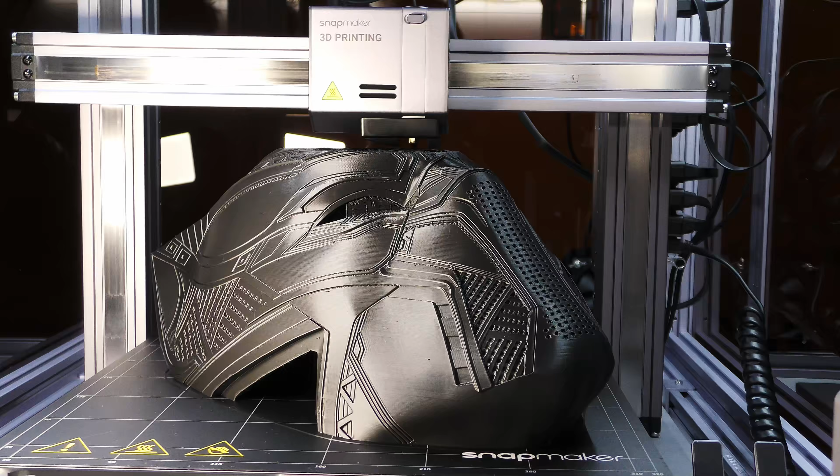Today we will take a look at this big boy, the Snapmaker 2.0 A350ENT, which means the all-in-one version from the bigger Snapmaker with the Enclosure and the TMC silent stepper drivers.

Let's crank it open. Welcome to the Snapmaker family.

Oh, and some stickers. We have a guide for the machine, and also, because this is the bundle, we have a guide for the enclosure. We will start with the machine and then work on the enclosure.

Packed out everything from the big box, and now comes the small boxes. After filtering down the boxes, there are not so many, to be honest.

We have this fancy toolbox, the clamps, finally a good goggle for laser, which is a proper OD6 Plus, 190 to 540 nanometer, CE certified, and also CNC glasses, which is just against the splinters. Wow, okay, that is slick.

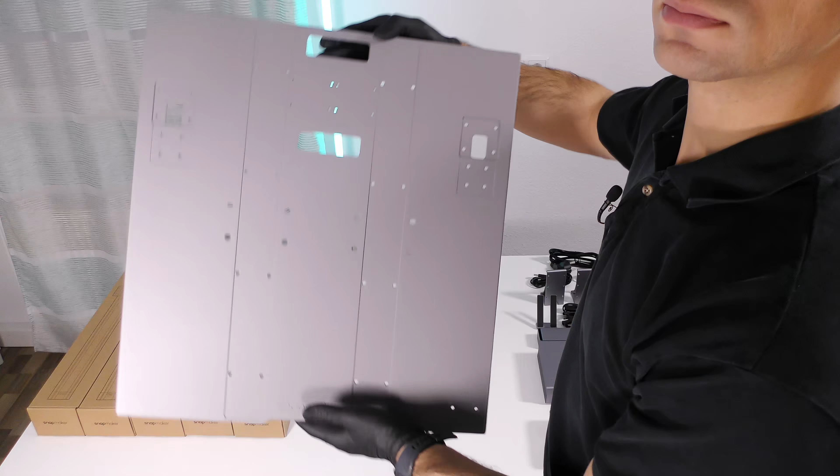All parts are so well polished and look pretty cool. And here is the rock-solid one-piece die-casted aluminum base plate.

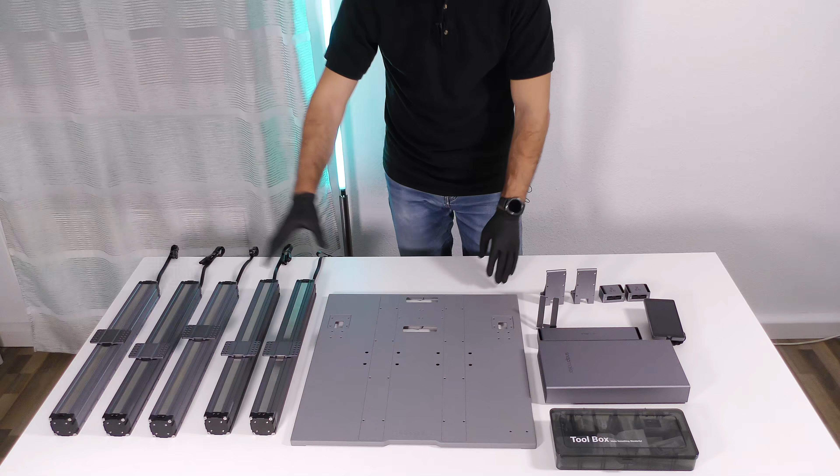Packed out everything. We just left with the base, the linear modules, the power supply, and these parts, so it's not that much. It should be a quick assembly.

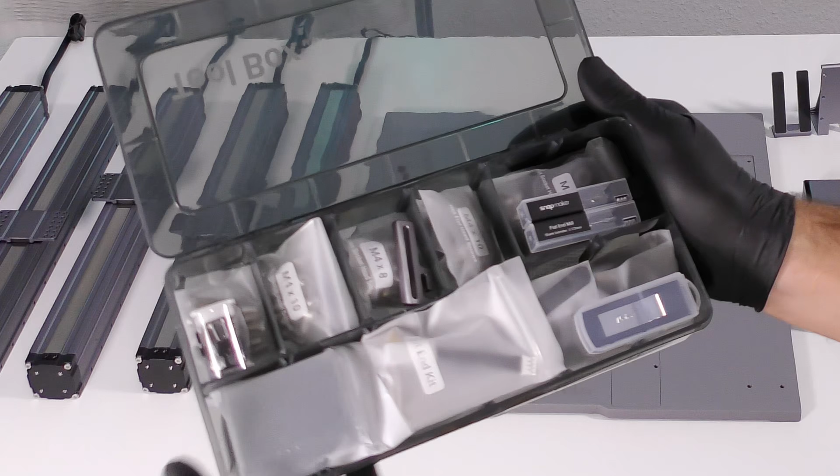The toolbox has everything labeled. The flat end mills for the CNC. These are the feet for the base.

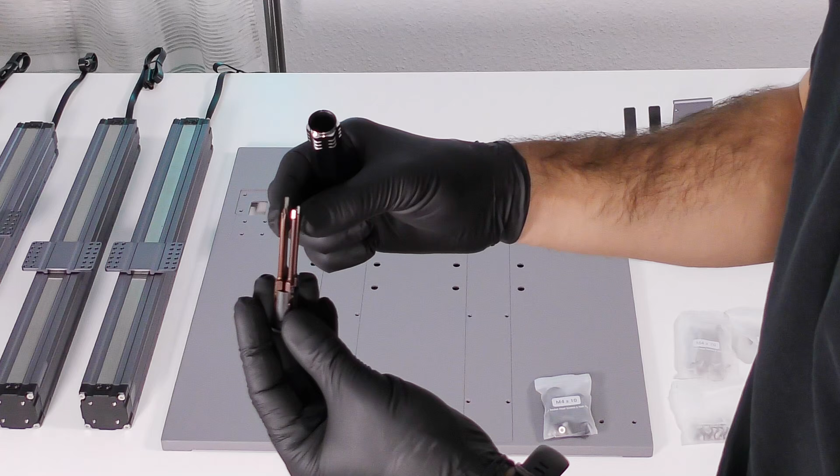After unpacking all the packaging, the most important tool is this one. We will use it a lot. We can just open it and choose one of the heads that we need. Let's say this one. Then put it back and put this in place.

Following the steps in the prettiest manual I've ever seen, the assembly is entertaining. This is one of my favorite parts, getting to know your machine and at the end feeling that you are also involved a little bit in the final result.

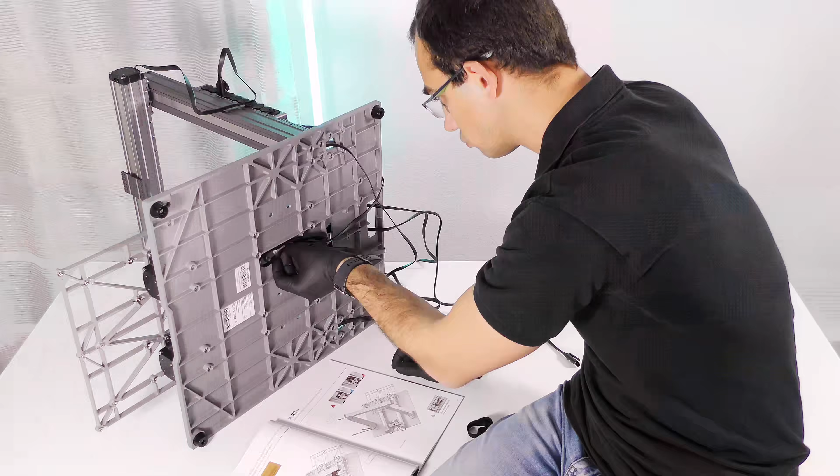For the cable management I use some cable tie mounts to hold the cables in place. And just like that we are ready with the base structure.

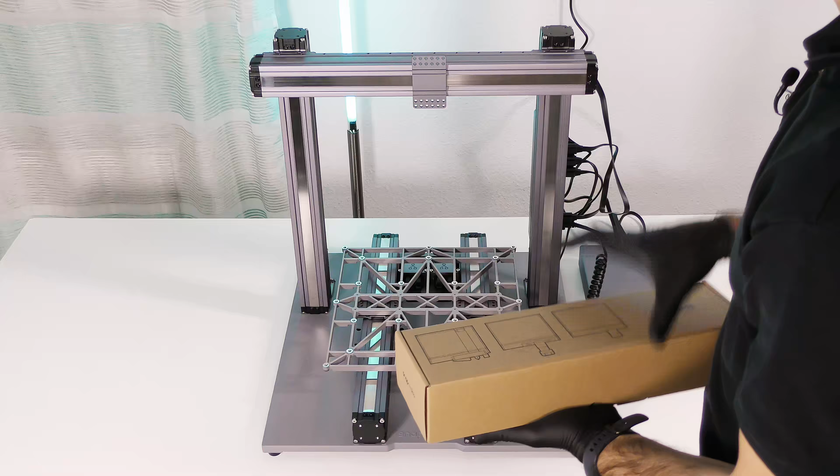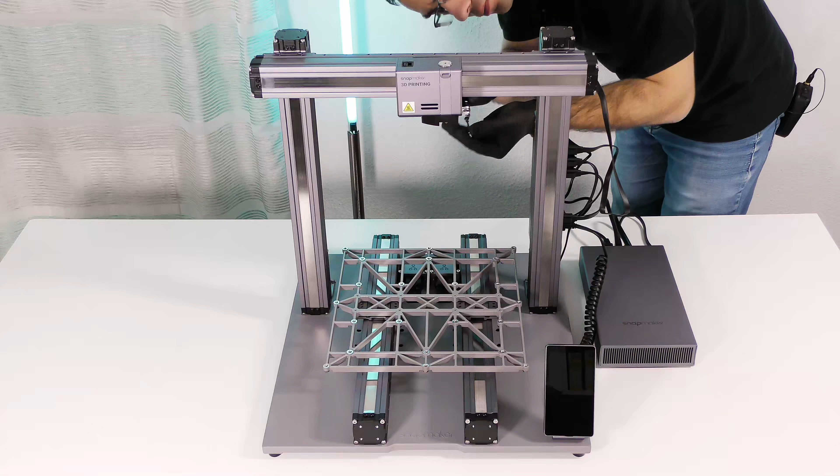Let's start with the 3D printing module: the 3D printer head, the CNC, and the laser. The 3D printing head is fixed with 4 screws onto the X-gantry.

The filament spool holder is a pretty simple design, which works well with the delivered filament, but it tends to be too short for bigger spools. So if you want to use one of those, over 1 kilogram filaments, then you need to find some alternative solution. And here is the hot bed.

A lot of magnets, the temperature sensor, and the well-connected cable. The heated bed is fixed through 12 screws, which helps keep it flat when heated up, but at the same time it is really time consuming if you want to swap between the different features of the machine.

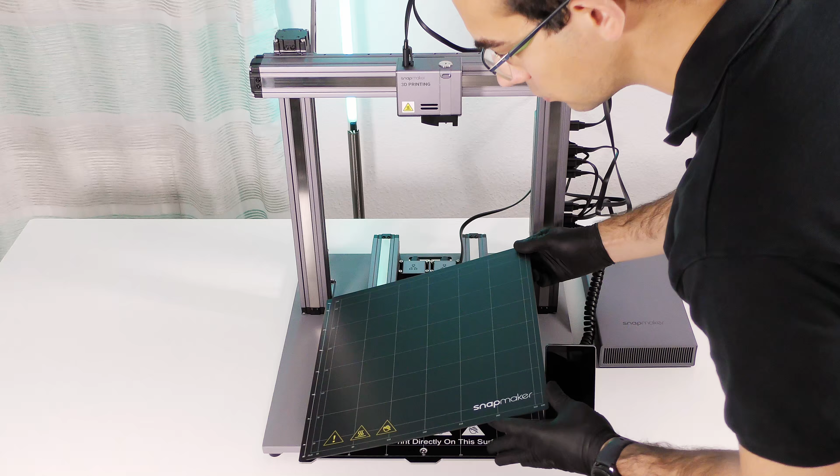I missed some positioning pins for the magnetic sheet, which would also help a quicker swap between prints. So now I just put it on and shift it into place, which required relatively low force to do so.

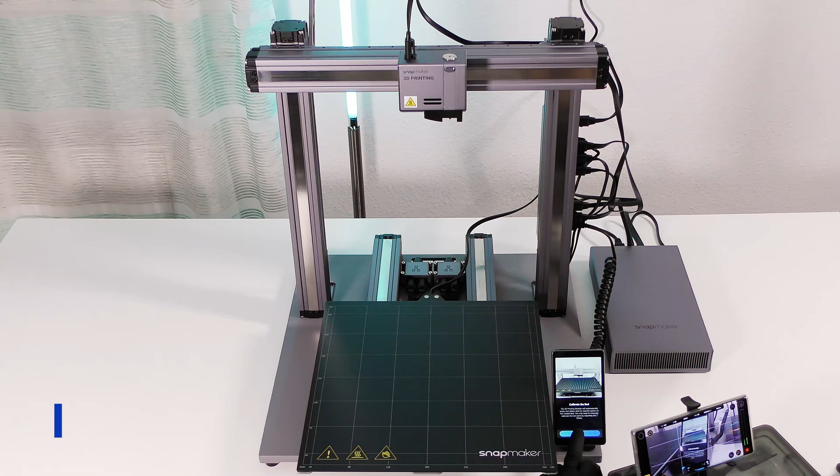And the first start. After turning on the power supply, the Snapmaker will recognize which toolhead is installed, and it shows some related safety instructions, and because we installed the 3D printer toolhead, it prompts you to first make a bed calibration. The instructions are informative and clear.

With the help of this 0.1mm thick plastic calibration sheet, we can set up the perfect distance between the nozzle and the print surface. By the way, this procedure needs to be repeated every time you swap to another toolhead.

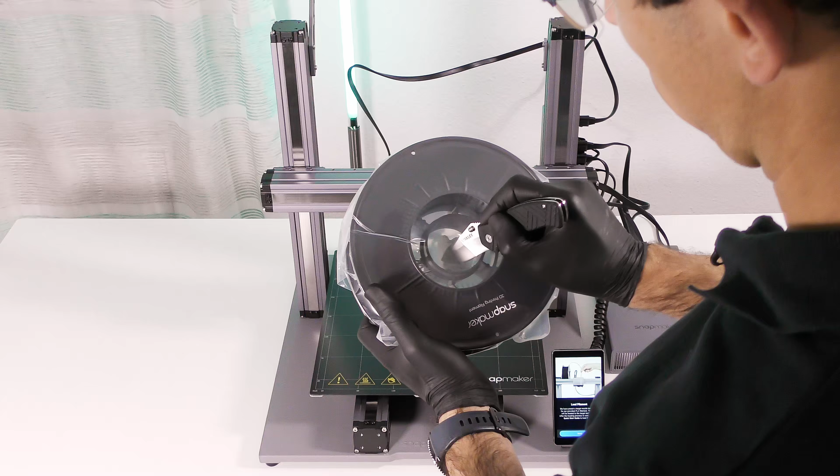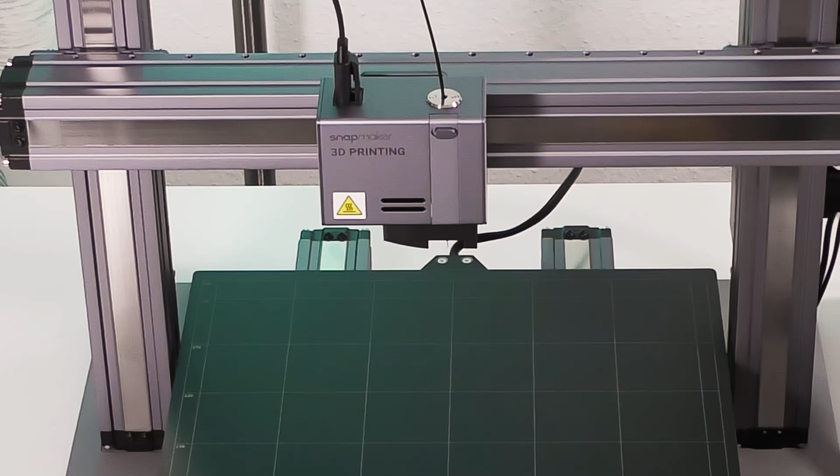And now comes the filament. We have to push it into the print head, and after the nozzle reaches the required temperature, the filament can be loaded. We can see here that Snapmaker made a quality check on the print head with some blue filament.

And awesome! We have just finished, but then we immediately got some outdated linear module messages. No problem though, because the Snapmaker has a Wi-Fi connection, you do not need any USB stick or computer to upgrade the firmware. Just go to settings, firmware, and click update. It will download the most current firmware and install it for you.

At the 3D printer settings we can turn on and off the auto leveling and also set up if you want to perform it before or after the bed is heated. And also choose the sample points amount between 3x3 and 5x5.

And now I show you the quickest way how to assemble the enclosure.

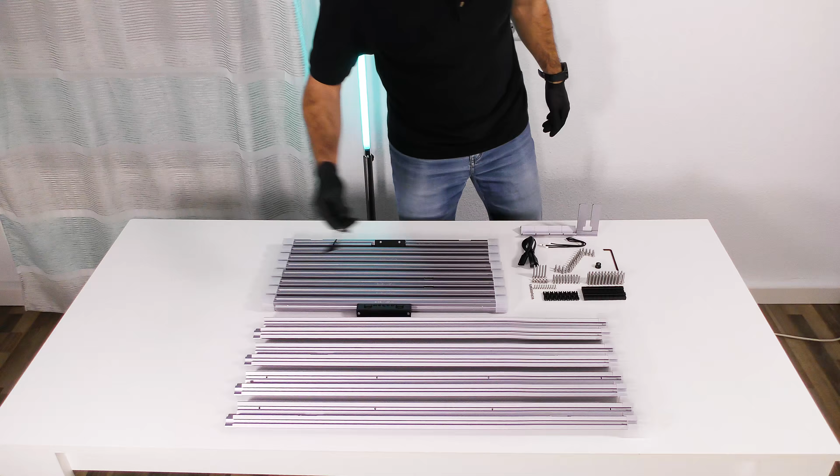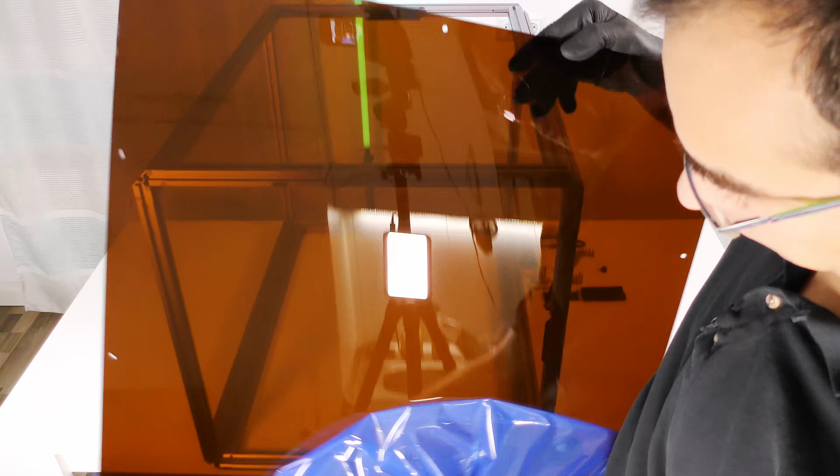The side panels are made of this special laser-safe orange colored acrylic to be able to see what's happening inside, but at the same time it also protects against dust and fumes, and has a sound dampening effect also, which we will measure later. The enclosure has an exhaust fan, 2 door opening sensors, and LED lights.

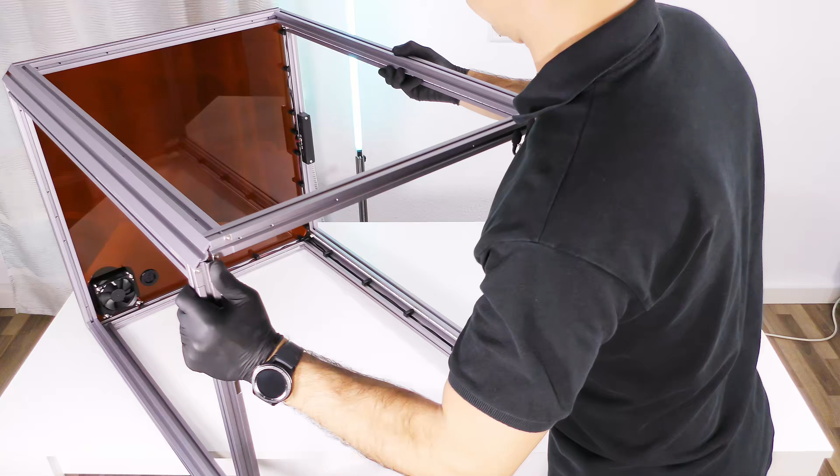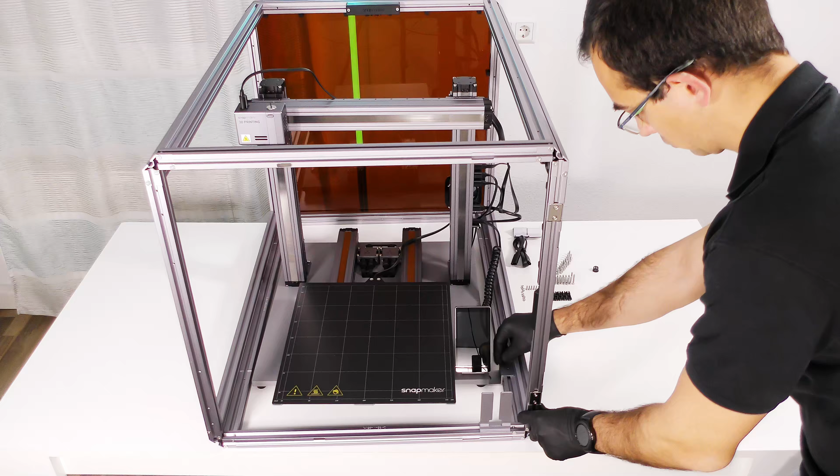The wiring for all of these can be hidden in the aluminum extrusions with the help of the enclosed plastic clips. And we have just arrived at the marriage, where we can connect the enclosure with the machine. There are 4 S-shaped aluminum parts which fix the machine's position inside the enclosure through its rubber feet.

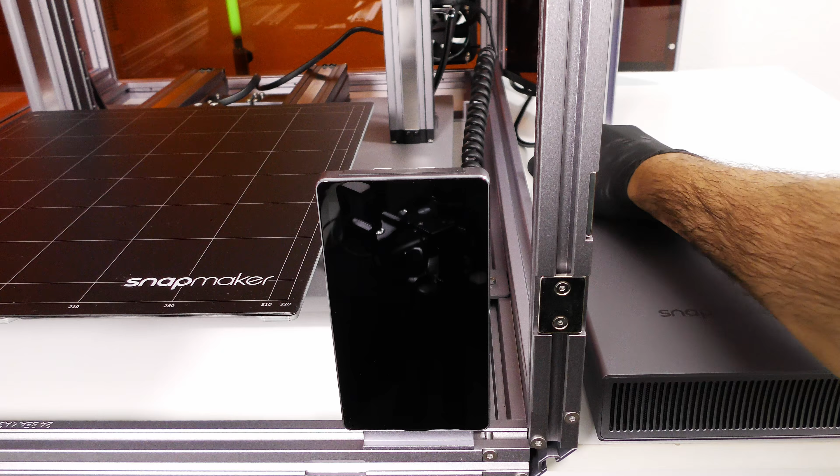After our sponsor break, let's see what we can find in the controller's menu. After turning it on the first time, with the enclosure connected, we got an outdated enclosure module message. But again, real simple: by clicking the update button, it will download the required files and update itself. So now we got an extra enclosure icon in the menu, where we can turn off and on the LED lights and the exhaust fan.

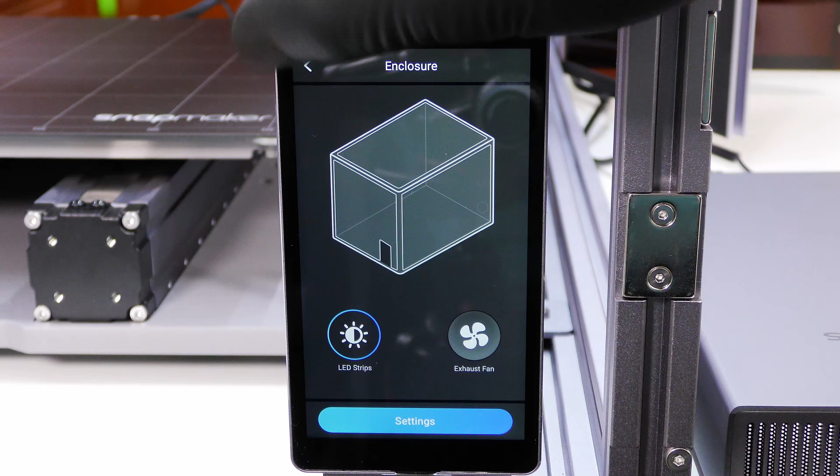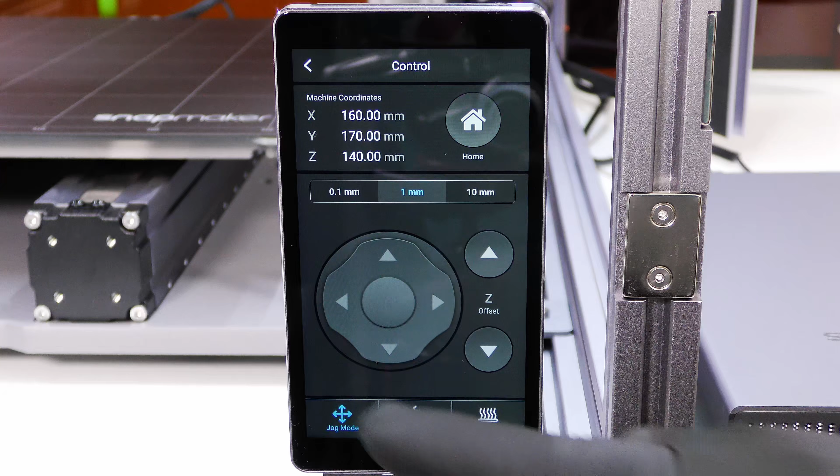Under settings we can choose to light up the enclosure automatically after turning on the machine. Under files you can see the local and USB stored files, and here you can edit and sort them. Then under control you can move the 3 axes plus the extruder stepper motor and control the nozzle and heated bed temperatures.

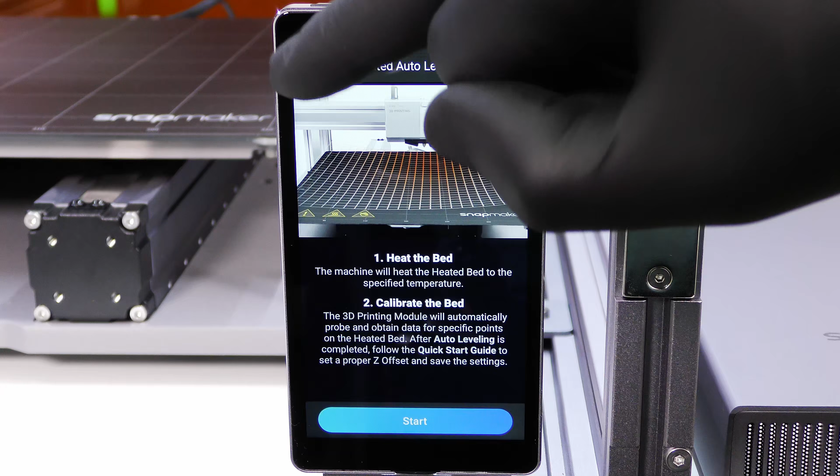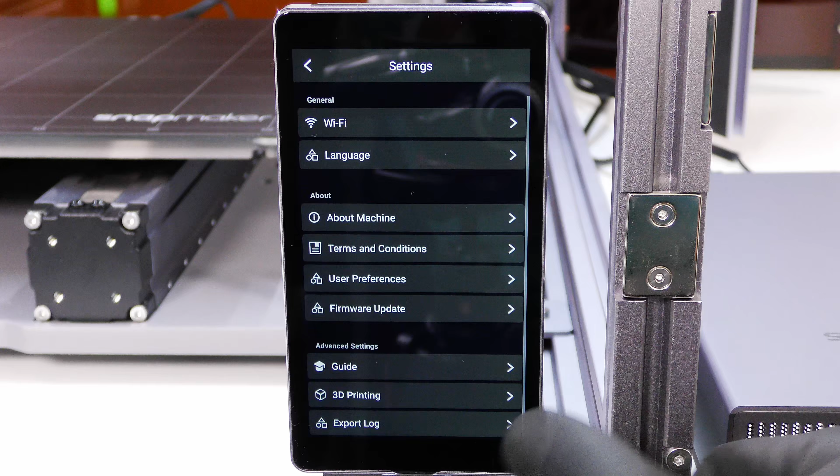By calibration you can calibrate the bed and set up the nozzle height. Under settings you can set up your Wi-Fi connection, change the language, and get information about your machine. By user preferences you can turn off the anonymous data sharing if you fear that Snapmaker will steal your data. And here you can check for firmware updates and read some info about the new features and improvements of your actual firmware. By 3D printing settings you can toggle the auto leveling and heated leveling features.

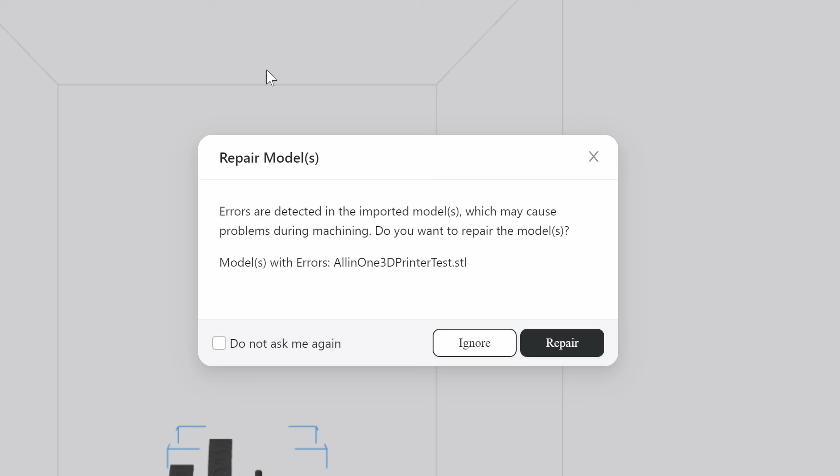And now it is time to finally print something. After launching the Snapmaker Luban software, I choose the 3D printing option, import an all-in-one 3D printer calibration model made by Gabo X3D, and after a quick repair, generating the G-code file with the default normal print setup, we can load the G-code to the workspace where you get a quick preview about the model.

By connection, we can connect to the machine through Wi-Fi and we get a prompt window on the screen which needs to be accepted, and after that we have connected. We can control from here the enclosure features also, like the LEDs, but we can even send G-code commands. For example, the M1010 S3 P100 will turn on the LEDs at full brightness. With S4 we can control the exhaust fan.

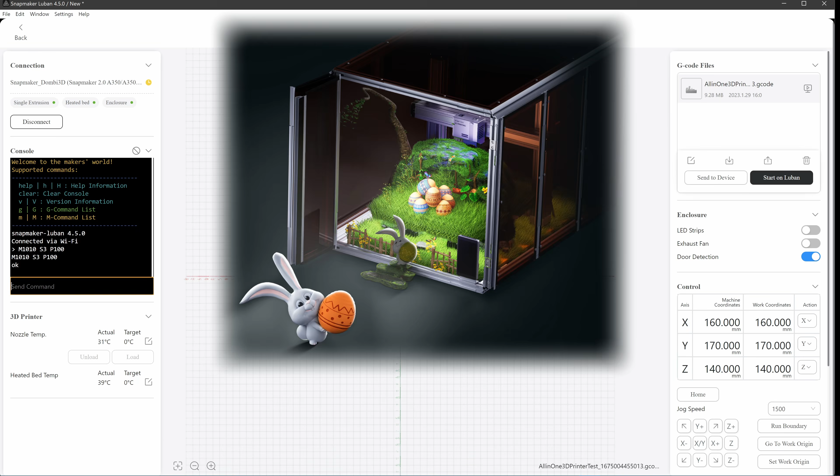And here is an Easter egg: if you write a smaller number after the P, we can even dim the lights or slow the exhaust fan speed, which is not possible in any other way right now.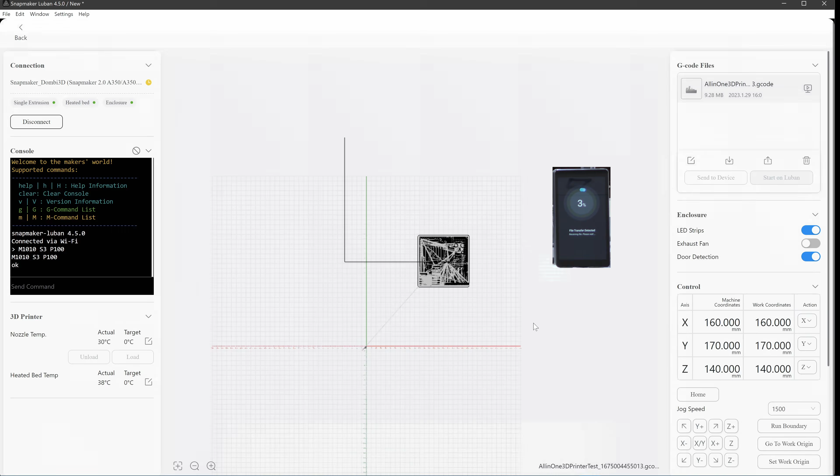From here we have two options: send it to the device or start the print on Luban. If we choose the start on Luban option, we will lose the power loss recovery feature, but more about that later. So I stopped the print process, resliced it with the fast print option to reduce the printing time from 10 hours to 4.5, and sent the file to the device.

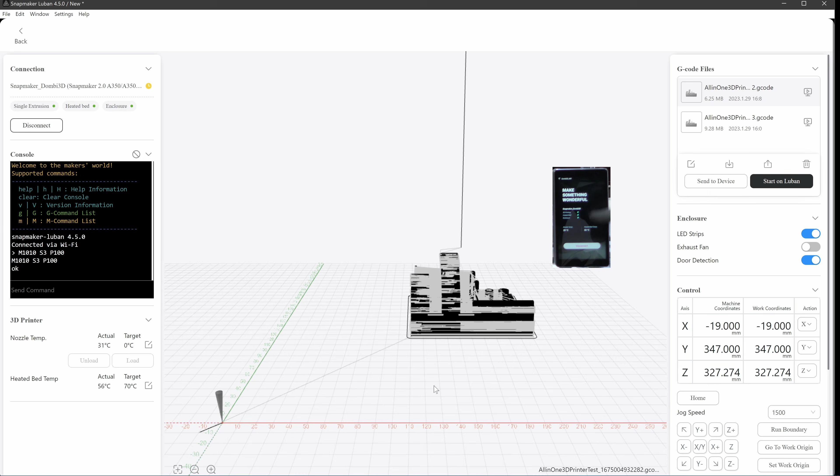On the touchscreen, however, we cannot do anything while the Wi-Fi connection is live, so first we have to disconnect from it. I quickly delete the 10 hours long version and start the print that we have just uploaded.

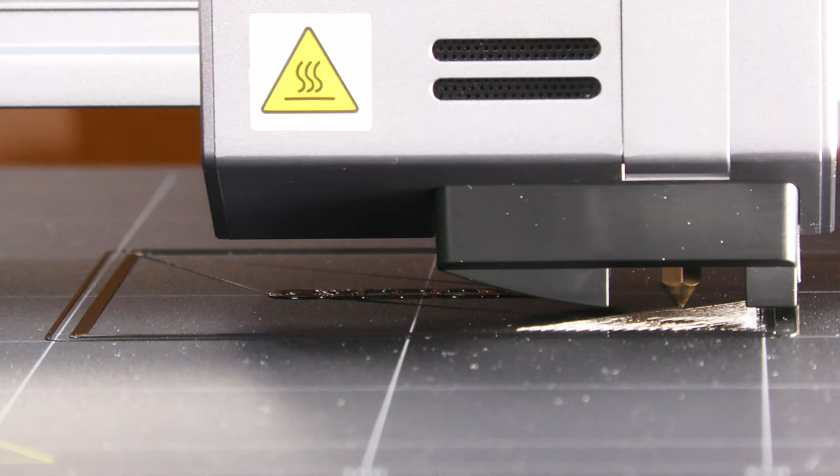By checking the first layer, I realized that it is too close to the build platform. But after I set up the 0.05 mm Z offset, it looks much better.

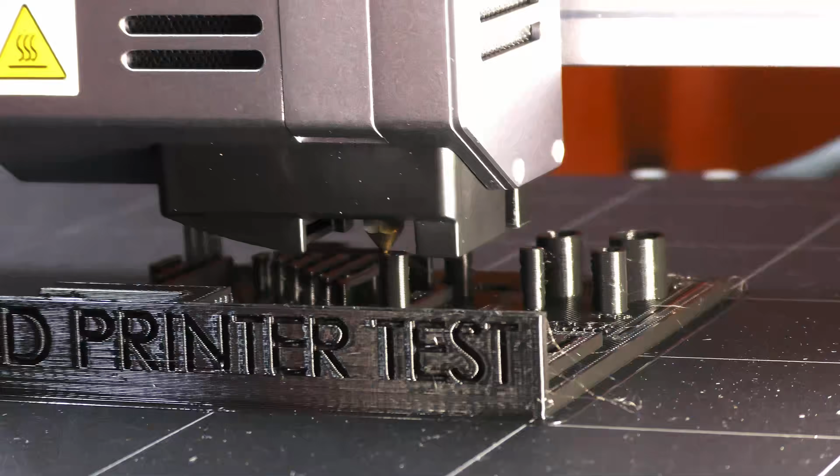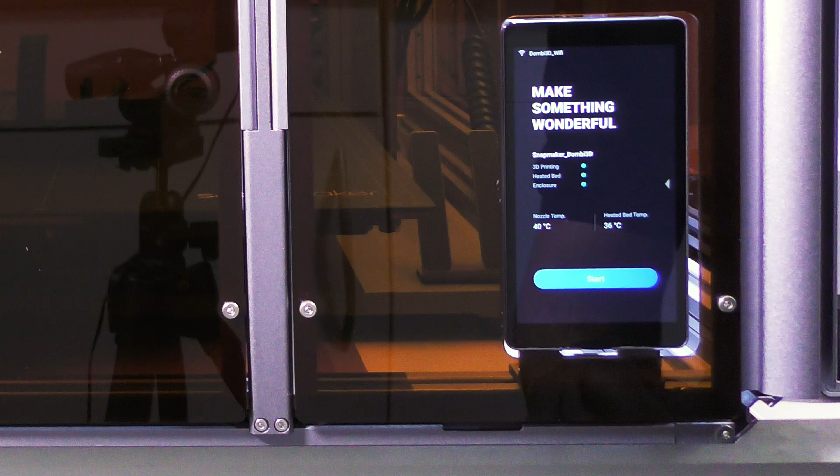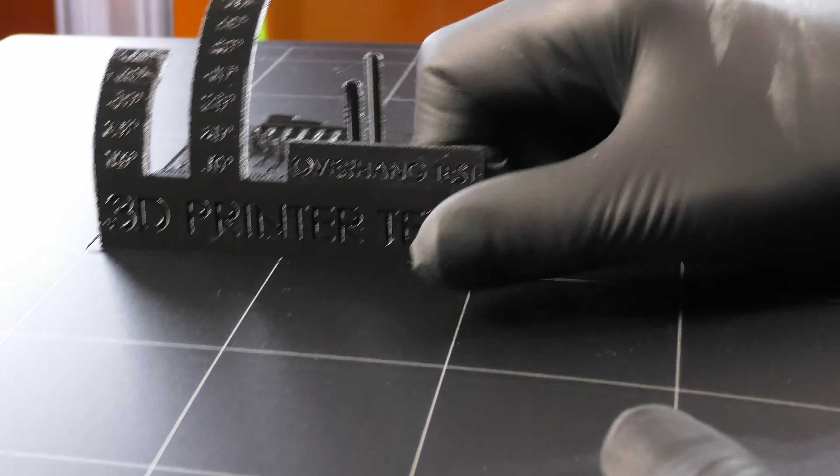It took almost 5 hours to finish the print instead of the 4.5 hour prediction. The door opening mechanism is prone to getting stuck sometimes, but with some practice you can open it much better, as I did here. The flexible print sheet should help us take off the part just by bending it, but probably because of the too-low first layer height I had, it tends to bond really hard to the surface, so I had to use the spatula to release it.

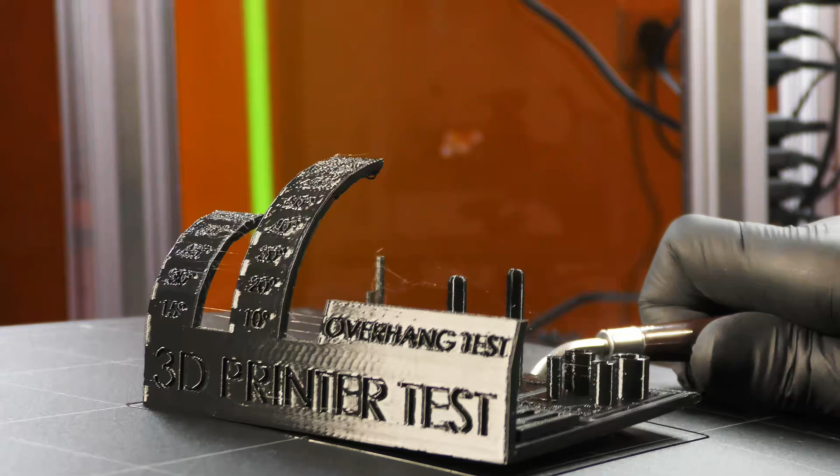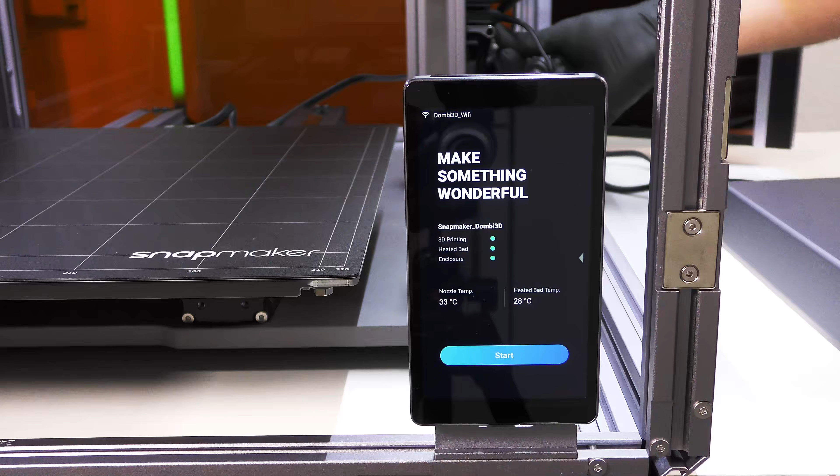Because I am much more familiar with the Prusa Slicer and it has a built-in Snapmaker profile, and also because it has much more features than Luban, I sliced the same file with the same layer heights, infill density and first layer speed as Luban had, and exported it to the USB stick. Then I plugged it into the most fancy USB connector I've ever seen on a 3D printer and started the print. One disadvantage of the default Prusa Slicer Snapmaker profile is that it has no compatible thumbnail options right out of the box, but we can use a post-processing script if it is important.

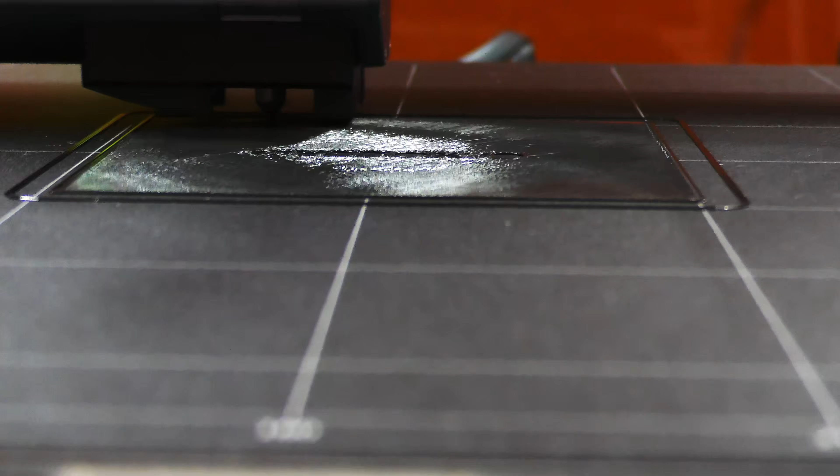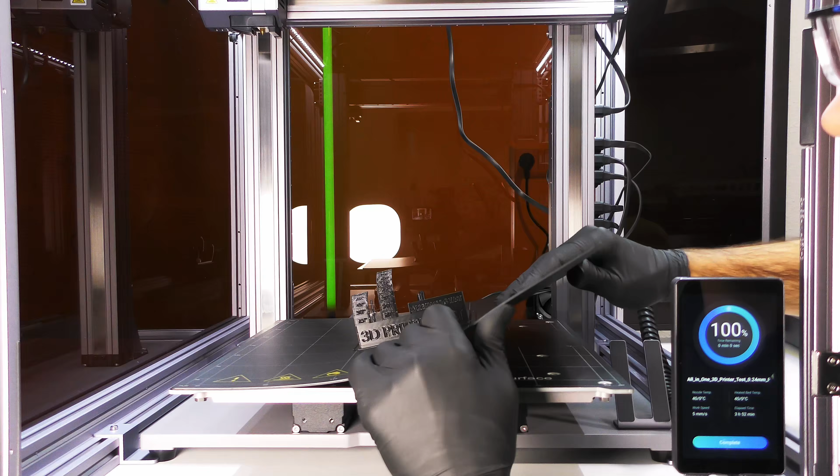You can find the link for the script in the description. Notice that the Prusa Slicer estimated printing time is 3 hours and 42 minutes, whereas the Snapmaker predicts 2 hours and 26 minutes. The first layer was perfect in this case. The second layer printed much faster, and the printing job was done in 3 hours and 52 minutes. It took just 10 minutes longer than estimated by the Prusa Slicer. And now the print could be released much easier from the bed.

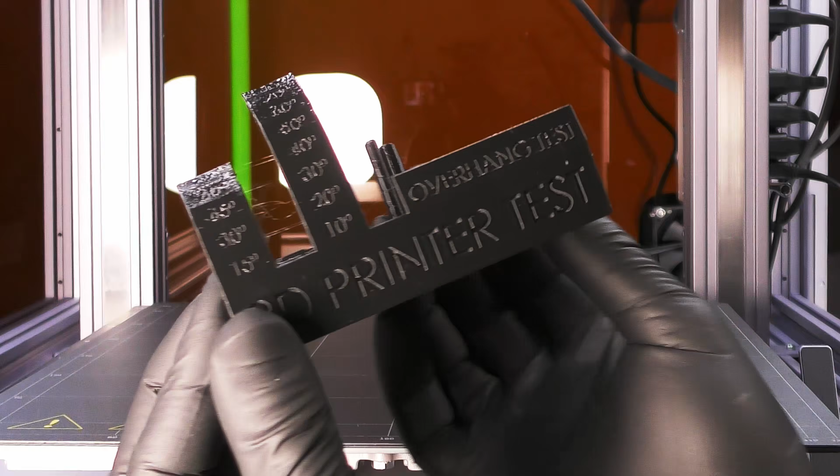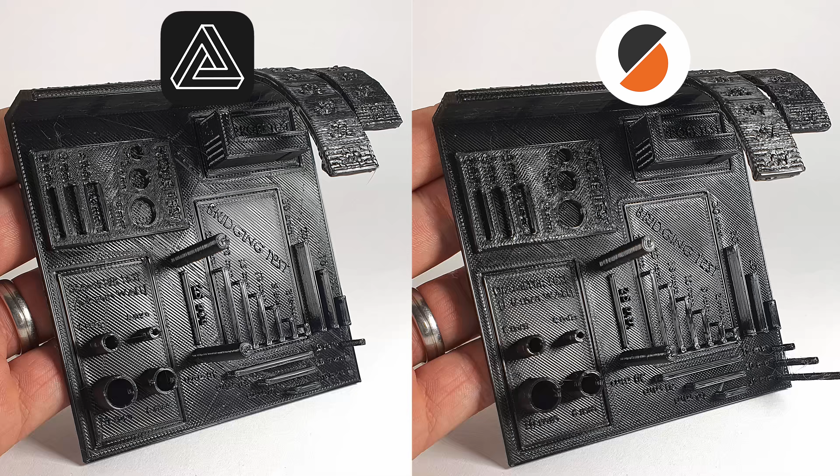By comparing the two prints, of which the Luban sliced one took 5 hours and the Prusa Slicer one took less than 4 hours, we can see the differences on the edges, on the bottom where the Z-hop provides a much cleaner result from the Prusa Slicer. The same is true for the top surface also, where the traveling movement left some visible lines. The seams are hidden much better by Prusa Slicer, which results in a cleaner surface. By the overhangs, we can call it a draw.

Because of these points, I use the Prusa Slicer from now on. And let's start immediately with a 3 days long print, which is the Black Panther mask. After the two main parts are bridged together, I had the feeling that it is now rock solid and nothing bad could happen. To spare some time and filament, I sliced this print without any supports.

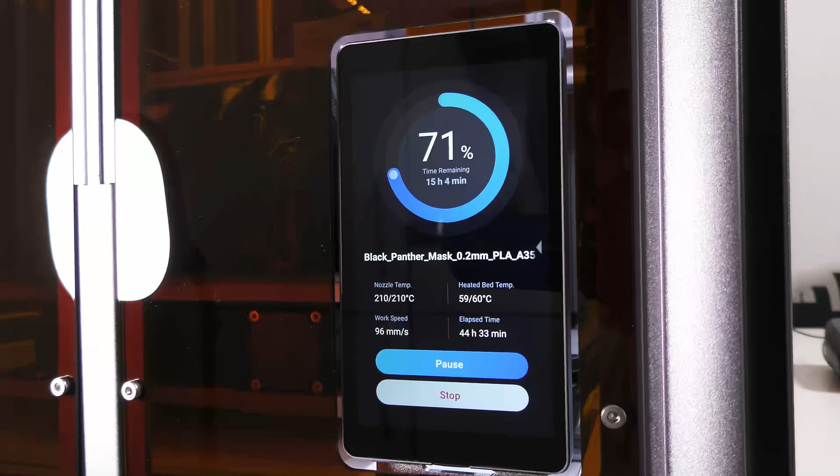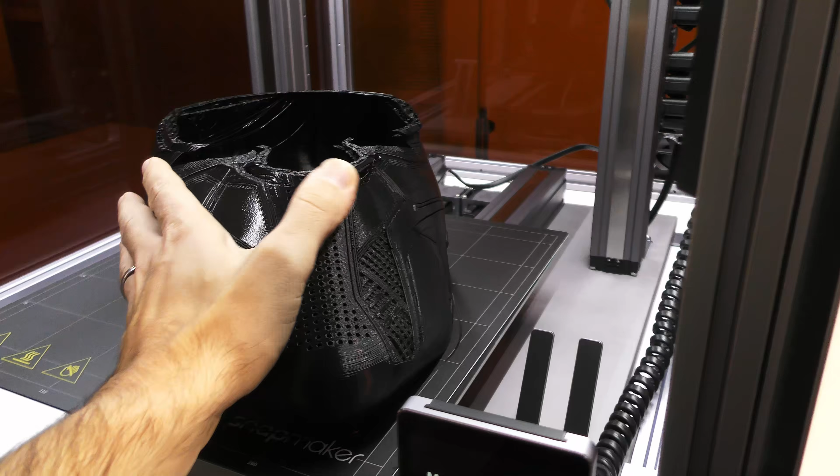Because of the big print volume, we are able to print such masks in one piece. I have checked the print job regularly and it looked really promising. Until once... Layer shifting! Why? The already printed surface was so nice, but then I realized that the whole build platform is shifted, which is caused by the upcurling filament between the eyes and the nose part.

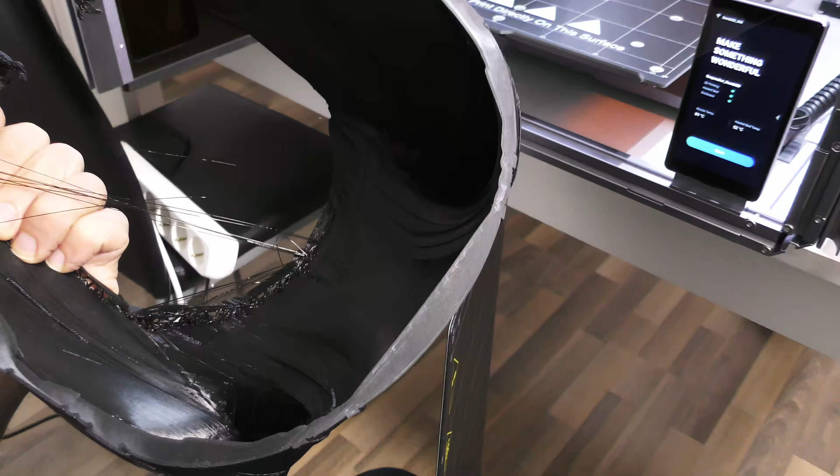It seems like the Snapmaker has no collision detection feature, however the built-in TMC stepper drivers would support that. By checking the power consumption, it took almost 7 kWh to reach that point. The peak power consumption was 335 watts, which is not bad from a 320 watts power supply.

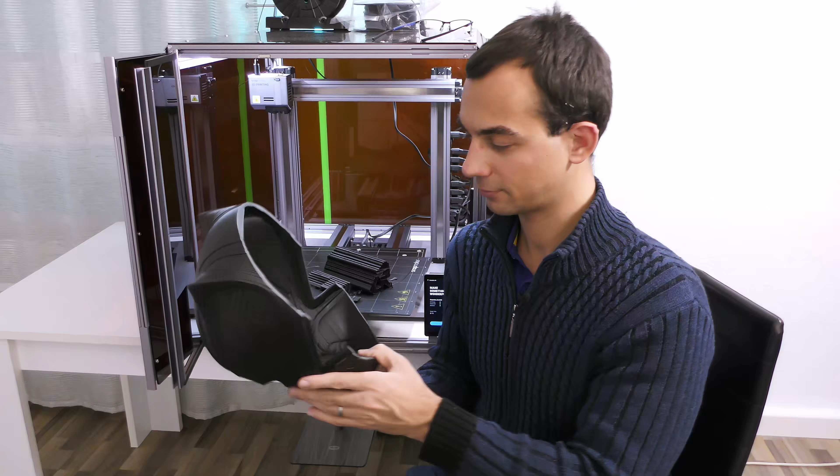For the next attempt, I used the black matte PLA Plus filament and also put some supports onto the critical parts. With this setup, the mask was printed successfully. After taking it off from the build platform and removing the supports, I could finally try it on and it fits perfectly. With sunglasses, it looks even better. I'm really happy with the result.

To print some useful parts, I chose some extensions for the Snapmaker itself. The first one is a tool head holder with some organic supports. Crazy how well it works.

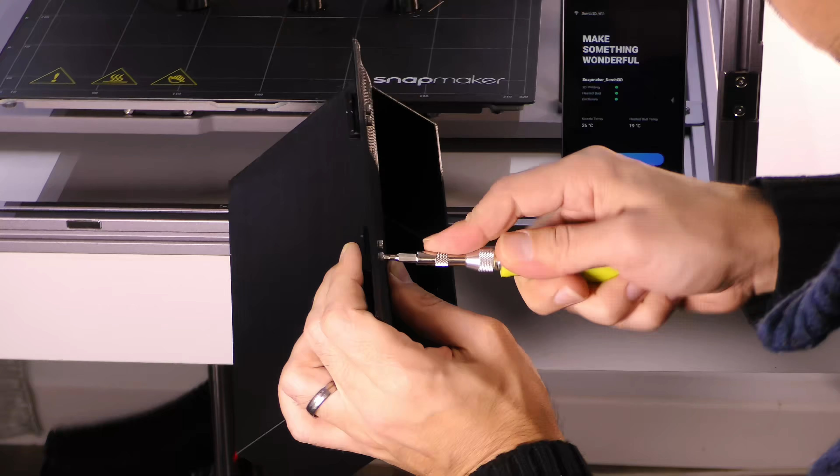There was some stringing, but the overall print quality was flawless. After installing the spare door slider plastic T-nuts to it, I have removed the strings with the help of a hairdryer and slid it into place, and now we also have a handy tool head holder for our machine.

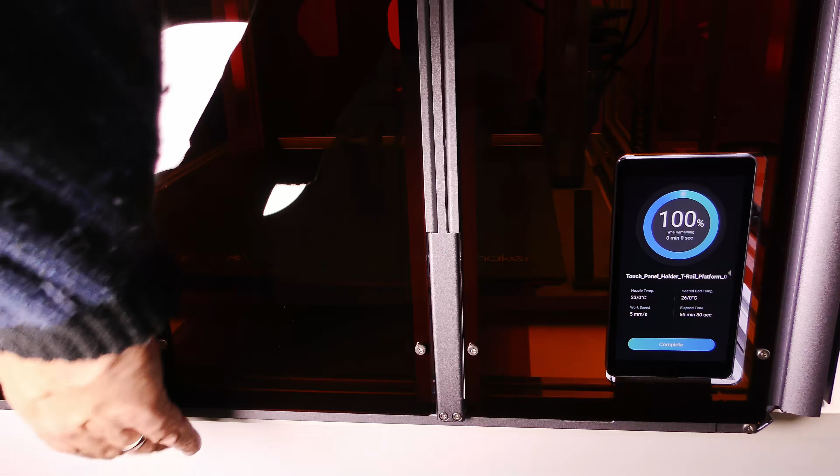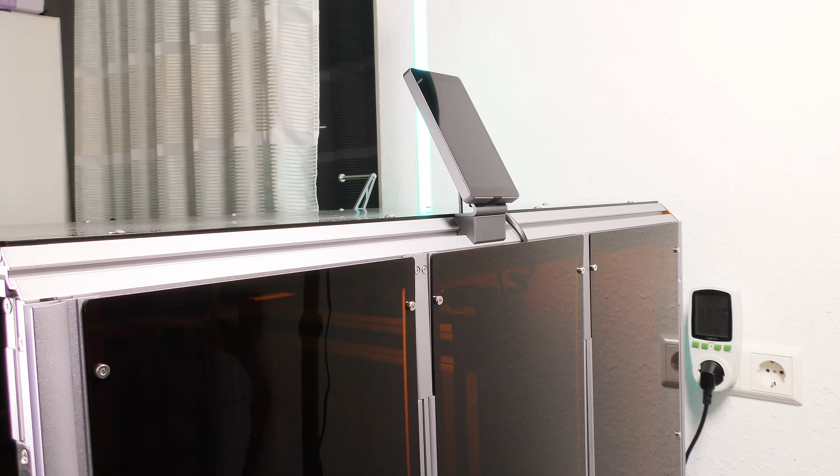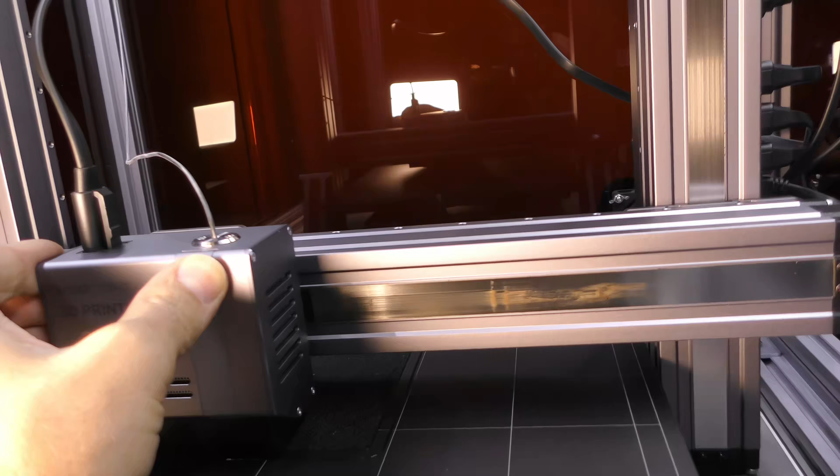Then I also tried to print some flexible TPU with the default Prusa Slicer configuration, but after the first layer, the 35 mm per second print speed tended to be too high and the filament jammed inside the extruder. But removing the Hilbert curve infill was fun though.

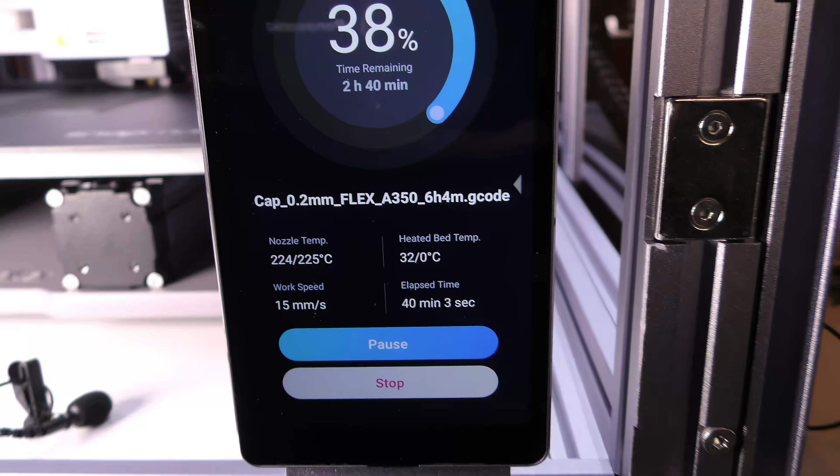As a second attempt, I went down with the speed to 15 mm per second and raised the nozzle temperature to 225 degrees Celsius. Like this, the part was printed, but it seems like the nozzle temperature was not high enough because there was poor layer adhesion at the end. With higher temperatures, it could be a flawless print.

Because I ran out of the TPU, I have printed this part from PLA again.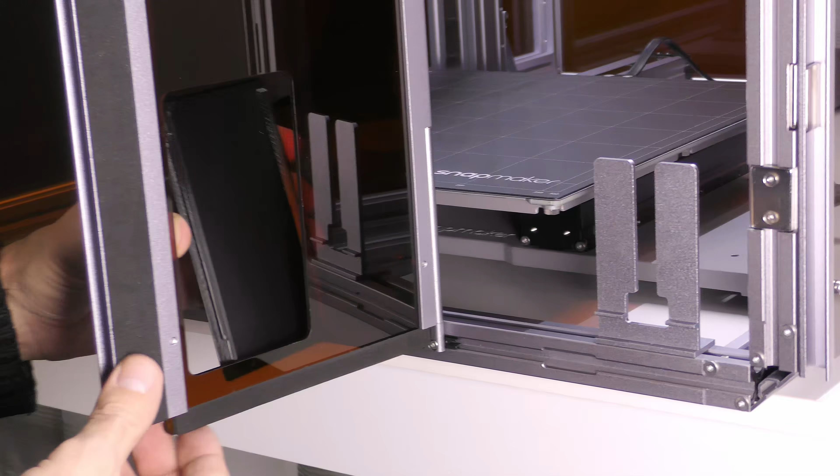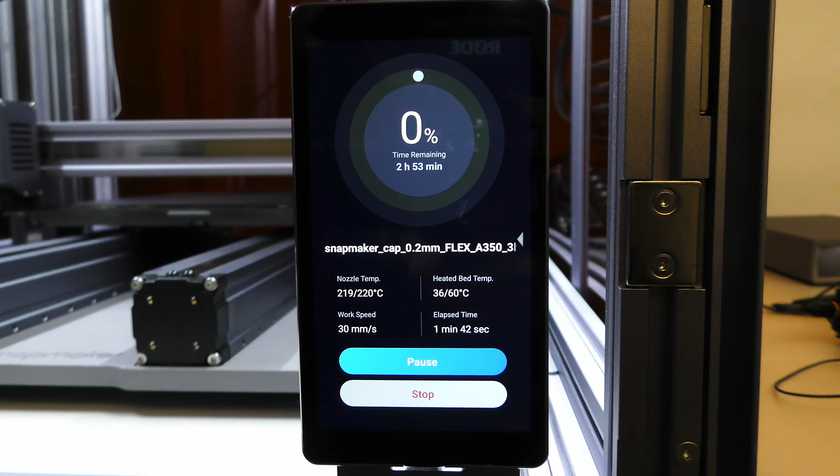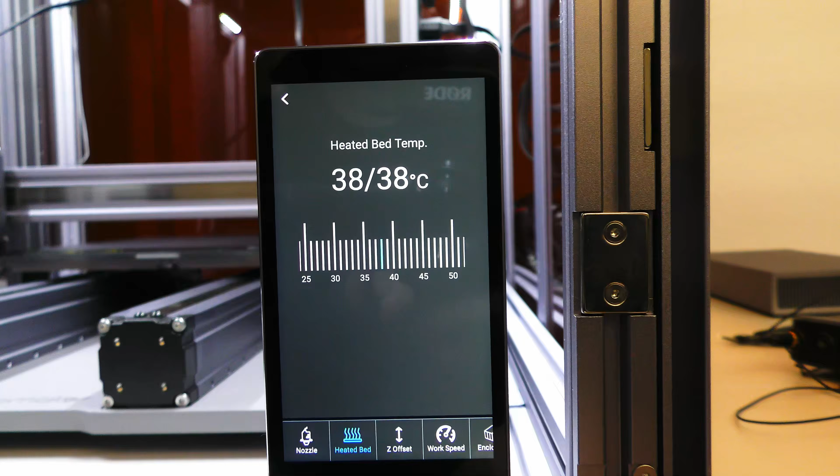And finally, I made some testing. One thing that I would ask from Snapmaker is to be able to override the slicer settings during the heat-up process. When I started the flexible print, I realized that the heated bed temperature was set up to 60 degrees Celsius, which is not needed. So I tried to turn it down, but when I went back to the main screen, the 60 degrees Celsius was still present. My next attempt was to pause the print and then set up the new heated bed temperature, which first seemed to be working.

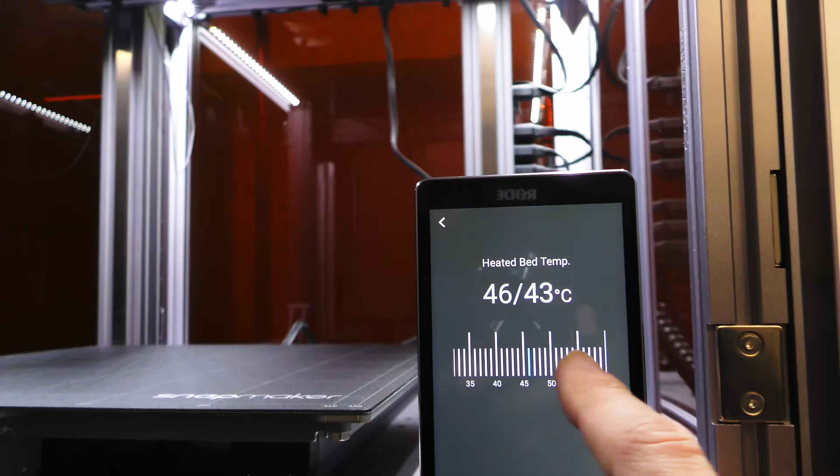But after I continued the printing process, it jumped back to 60 degrees Celsius again. So I ended up waiting around 6 minutes until it reached the 60 degrees Celsius, and after the printing started, I could finally turn it off.

As a next step, I placed the thermometer into the nozzle, which was beforehand cleaned with a cold pulling technique, and compared the temperatures. They are practically the same, so no adjustment needed here.

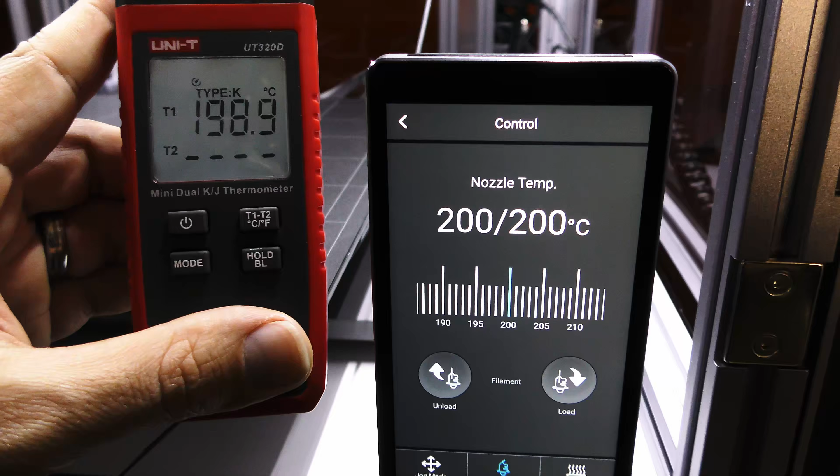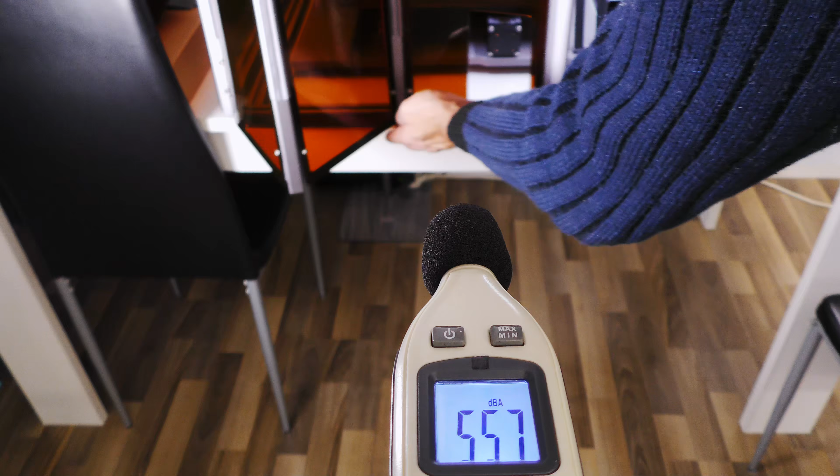Then I measured the noise level from 1 meter distance with the enclosure open and closed. We can see that from the mid 50 decibel range it went down to the sub 50 decibel range.

Now let's take a closer look at the heated bed. I set up 100 degrees Celsius as a target temperature, measured the time, and also recorded with a thermal camera to check how uniform the heat distribution is. It needs around 6 minutes to reach 60 degrees Celsius, and around 16 minutes to reach 80 degrees Celsius.

Officially that is the maximum temperature it is able to reach, but I was curious what the reality is, and it topped out at 88 degrees Celsius after 32 minutes of heating time. The temperature distribution, however, looks really uniform.

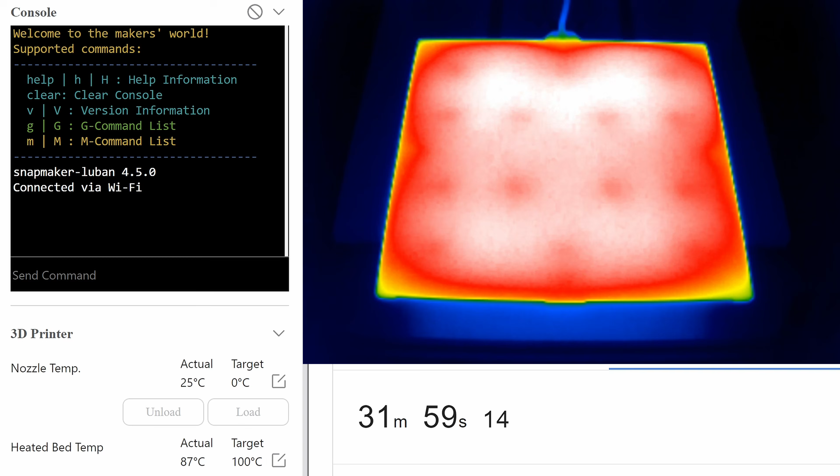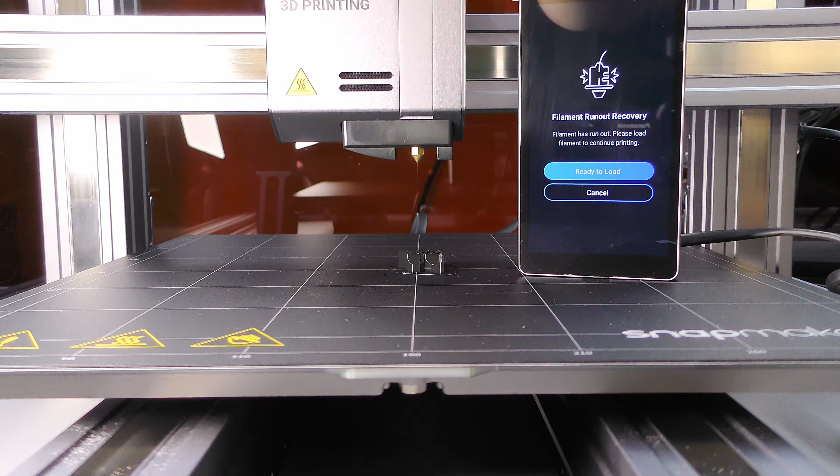One very important feature of 3D printing is filament runout recovery. So I also tested it, and as we can see, it recognized when the filament ran out and moved the printhead up. By clicking ready to load, the nozzle will heat up.

If the filament is not unloaded by itself by pushing the unload button on the touchscreen, we need to remove the filament manually through this little service door.

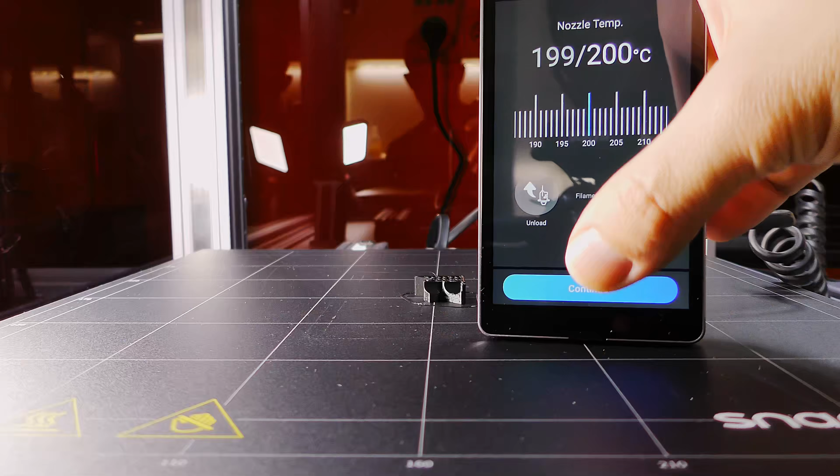After the filament is loaded, we can continue the print process. The nozzle will extrude some filament which we need to take off by hand, then it will move the nozzle to the exact position where it stopped, and then makes an unnecessary blob before it starts to move again.

Why? If we are lucky, it is somewhere inside, but if not, we will definitely see this blob on the finished product.

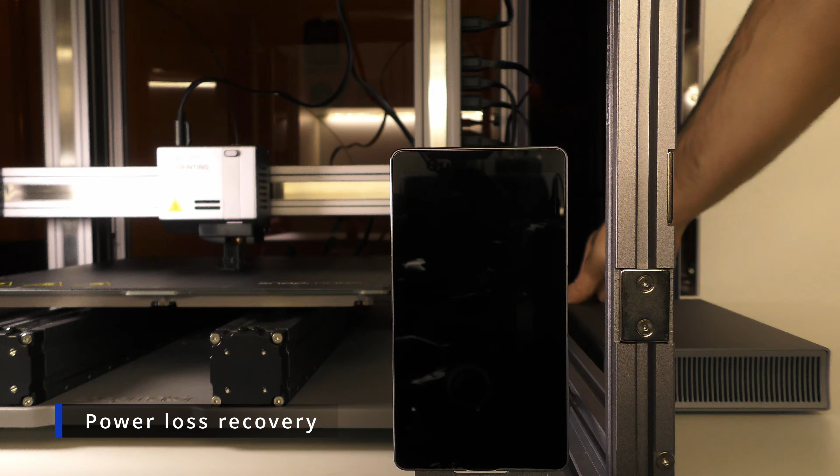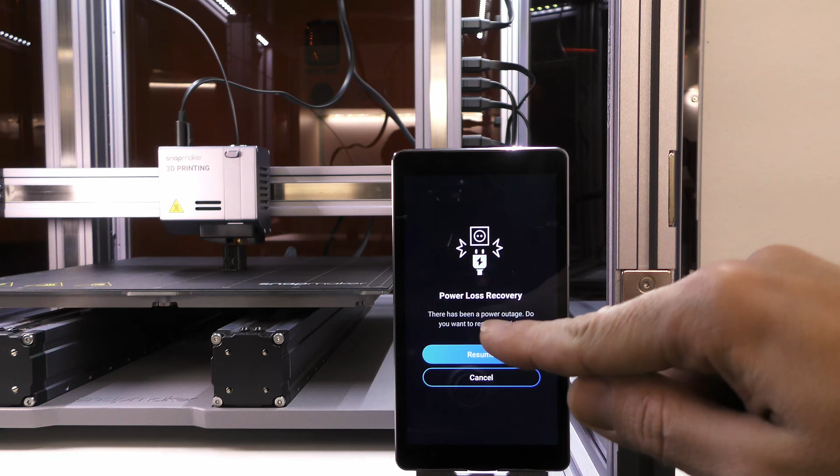And finally, a power loss recovery test. By losing power, the printer just stops where it is, not moving the printhead quickly away like the Prusa printers, which can be a problem if the printhead cools down and fuses with the printed part, because after we click resume, the printhead is raised immediately, which, in combination with a cooled down heated bed, can pull up the whole printed object from the bed.

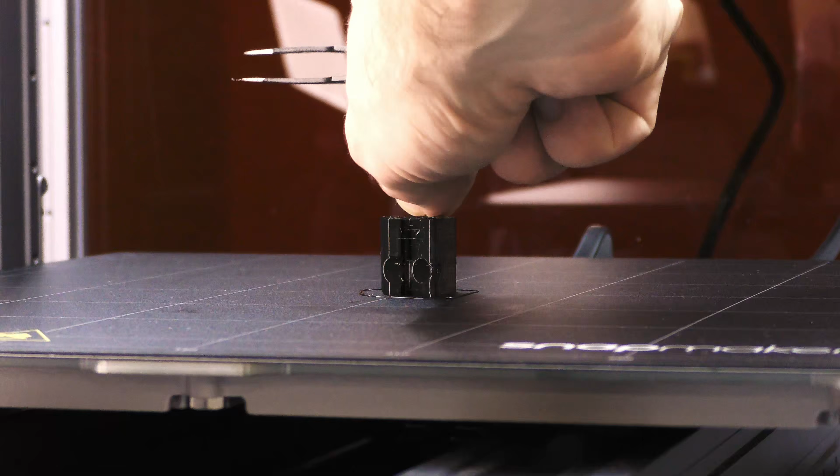It would be a better option to raise the temperature back up again, and only after that move to the home position. The resume process is the same as for filament runout recovery. After the temperatures reach the setup values, it extrudes some filament, moves to position, makes a blob, and continues.

So after this first episode of our Snapmaker review series, you got a feeling about this machine's 3D printing capabilities. In the following episodes we will take a look at the laser and the CNC modules also.

The 10-watt laser tool head and the rotary module will also be tested, and we will take a look at the available extensions like the emergency stop button.